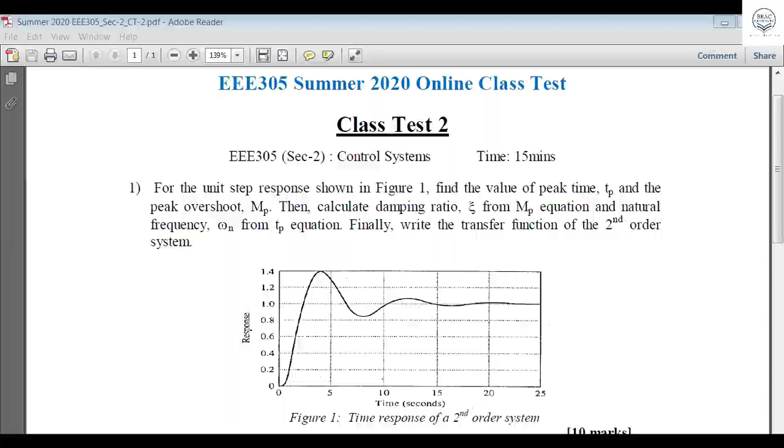Okay, once I think the rest of you have already sent it, so everybody is okay. Now let's come back to the class. I'm going to show one thing first before going to the class. All of you can see the thing. Can you see the screen or not? Can you see the screen, all of you? Yes sir, some of you already dropped the class, yes sir, I can see.

I'm going to take a snapshot of those who dropped, because I will catch them. Simply, you cannot drop without us. You have to go for the class. What do you do, sleeping at home now? Okay, just inform your friends to come back, otherwise I'll be catching them.

Now let's come back to the point. This is one important thing I'm going to show. Just after the exam, you drop out, what the thing is going on I don't understand. If your internet is cut or you have a problem, you should call me over the phone. Okay, now let's come back to the point.

This is the midterm exam cover page. I have already uploaded it to the Box and sent it to you most probably, or in the buX you can find it. You can see what you have to do. Download it and get a printout of it. I'm telling you again, download and print it, the hard copy. After that, by hand, each of you write your name, ID number, course title, Control System, course code 305.

Okay, 305, then semester, Online Summer 2020, and section 2. Once you're done, it is all you have to do today or tomorrow before the exam date, so that it is ready in front of you at the time of exam.

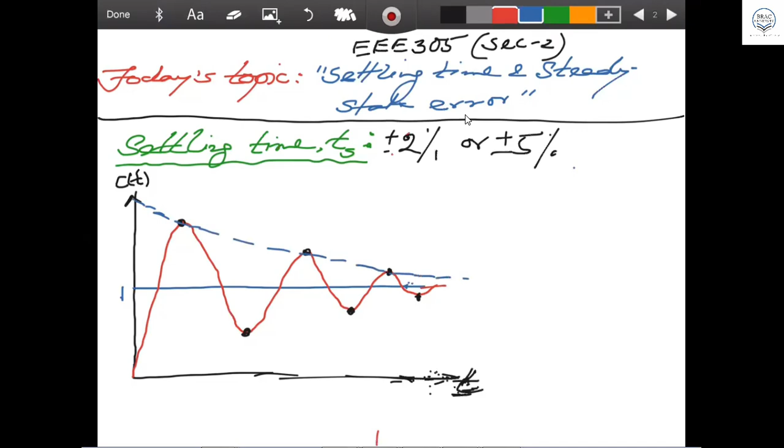That's internationally we have explained in the last class. Now, in order to find the settling time, if you look carefully, this is the peak, this down peak, up peak. What we can understand is that the sine wave is dying out slowly, exponentially. If you go on the lower side as well, the lower peak also gives you the impression that it is dying out exponentially. So the sinusoidal is exponentially dying out.

So what the blue curve represents is the envelope. If you go with the upper envelope, what is the equation for the upper envelope? The upper envelope equation will be only the exponential decay, e to the power minus zeta omega n t, divided by root over 1 minus zeta square. The exponential term will be here, because the blue envelope is an exponential curve, exponentially dying. So the sine wave term will not be here.

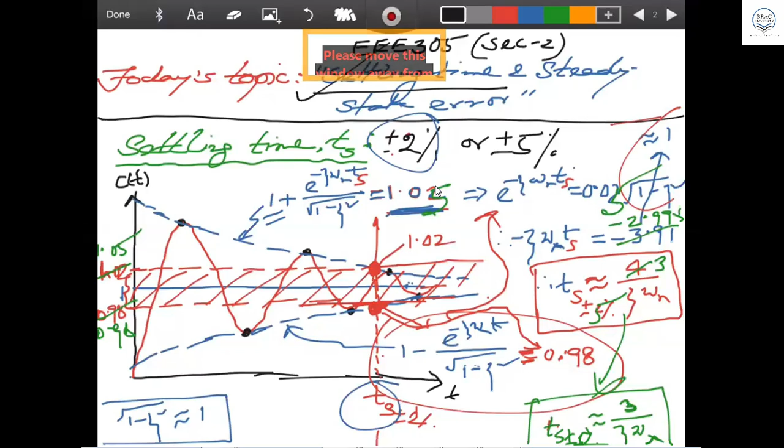I think at the end of this class, those who are having some problem, we can discuss it. Now, this is all about settling time. Now we are going to jump to the new topic, settling time part done. So second order time response is completed. Our new topic now will be steady state error. That is our next topic. This settling time in the last class was a continuation from before, as you know one of the parameters was left.

And today we are going to talk about steady state error. Steady state error plays a very important role, all of you should understand. If a machine is producing a nut bolt from the CNC machine, and you have designed a control algorithm and sent the data to the machine, and the machine produces a lot of nut bolts, but if there is an error, then continuously producing 1 million nut bolts, all will be rejected because a continuous error is present at the output. So error in the output is a serious problem in engineering, or in the field of engineering. As an engineer, you cannot allow that. So there should be error free output, so we have to study what steady state error means.

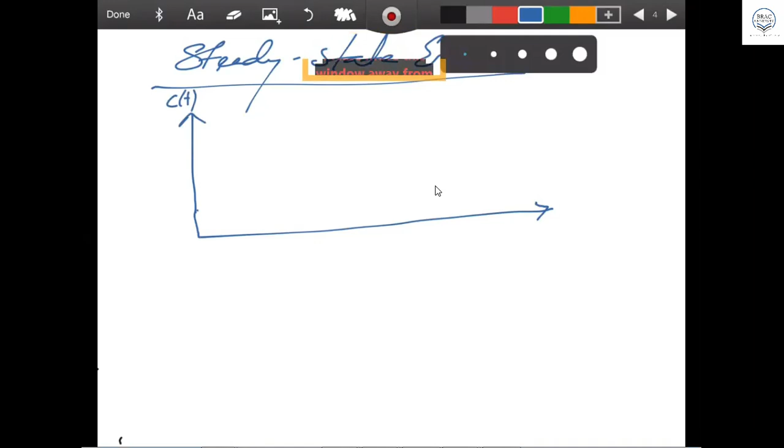And you can easily understand the steady state error thing. Look at it, I'm just going to draw a time response curve, as you already know. So if this is a unit step input, and this is the thing coming, ting, ting, ting, going like this, and meeting here. But as I said, there are some cutting points here, so we can say that this is the cutting point. What does it mean? It means t tends to infinity here. And this is the transient time, transient, and this is the steady state. Steady state and transient period. So the transient period is first, a shorter period, and steady state a longer, infinity you can go. Now, we have already studied last class this part, the transient part, all the parameters: rise time, peak time, settling time, all these things we have studied. And today settling time also done.

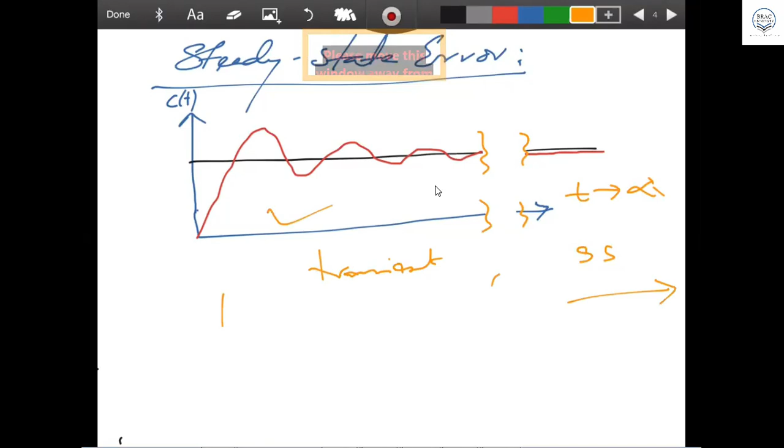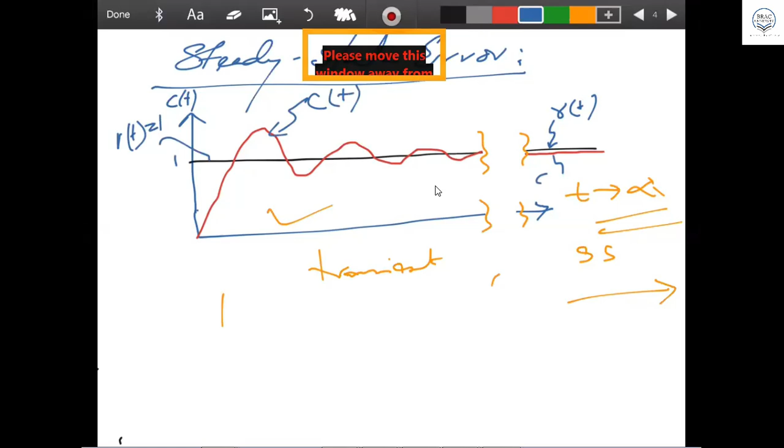Now, steady state error on the right hand side, there's a t tends to infinity side, that is steady state. And if you go, you can see here that this part is your RT. This is RT equal to 1, which is RT equal to 1, you know that RT equal to 1 is step input. And this one, the blue, the red one is CT. So CT is coming here, and RT is on the top. So the difference, you can see the error there, a little bit error is present, and this is your error ET.

So ET will be what then? ET will be nothing but RT minus CT. You can just think like that. Continuously, the difference coming at the output, and if for t tends to infinity this difference is coming, then we call that the error the steady state error.

T tends to infinity, this error is giving you the steady state error. Continuously the error is coming, it's steady. How to define it? Limit t tends to infinity of ET, where ET is the error, which is the difference between RT and CT.

So the steady state error, this is your steady state error definition. We can write that ESS equal to limit t tends to infinity ET.

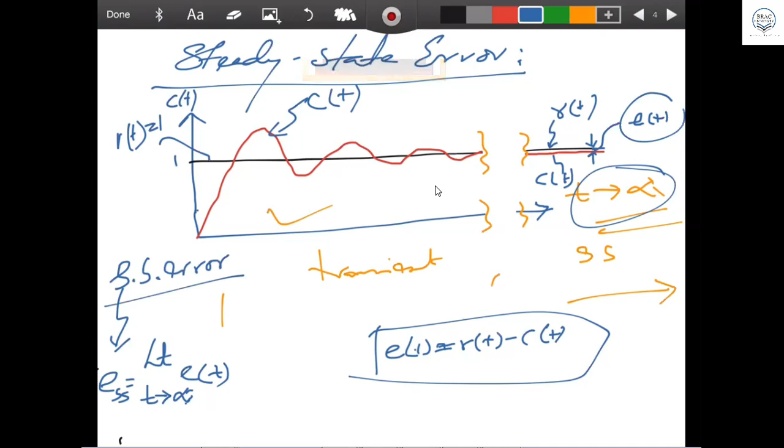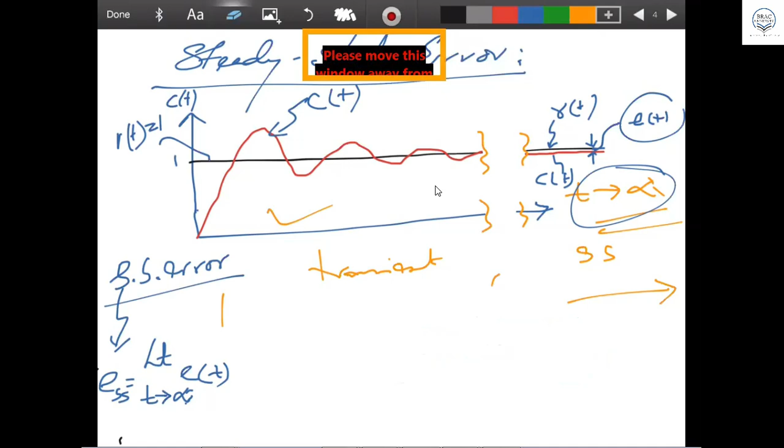Now, according to the final value theorem in Laplace transformation, what does it say? In EEE 243 signal systems you have studied the Laplace table, where the final value theorem gives you limit t tends to infinity of f of t, a function of t. If you take the Laplace transformation, you will get limit s tends to 0.

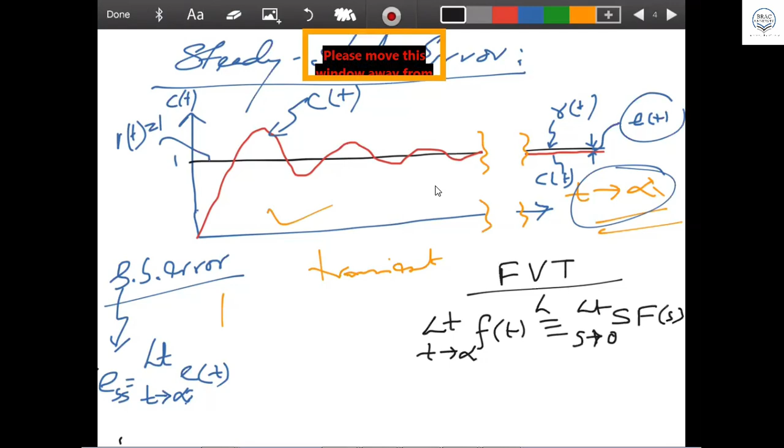s tends to 0, s times F of s, if the initial conditions are 0. So this is what the final value theorem says. This is the time domain, this is the frequency domain. So time domain relates to frequency domain like that.

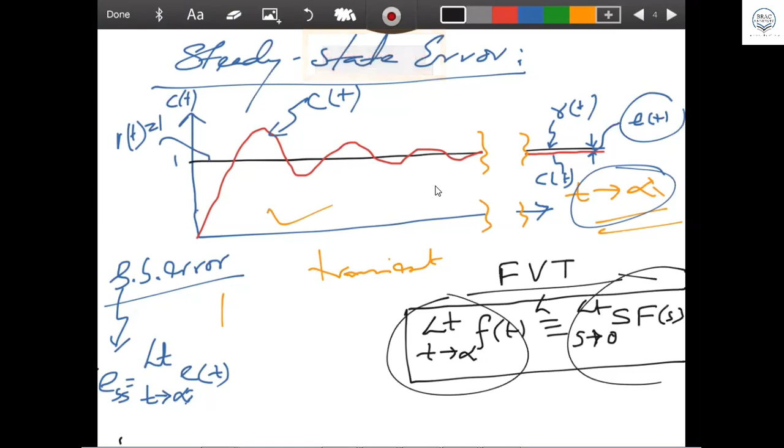So if this is the scenario, if you apply the FVT here, what equivalence comes? That is, e(t) will be in terms of the frequency domain. It gives you s tends to 0, and it will be S times ES. So your steady state error definition in the frequency domain, through the final value theorem, comes as Ess equal to limit s tends to 0 of S times ES.

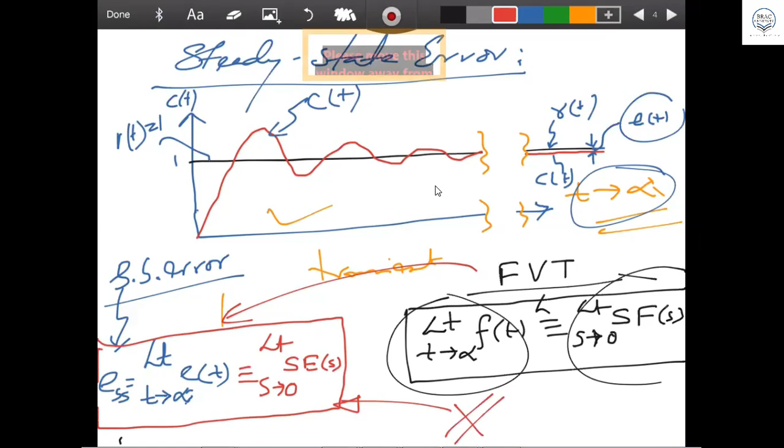So this is our definition in time domain as well as frequency domain, and we got that through the FVT, final value theorem. So what was that? The steady state error is equal to, in the frequency domain, limit s tends to 0 of S times ES. That is what we got. I think you all can remember this. Steady state error is equal to this.

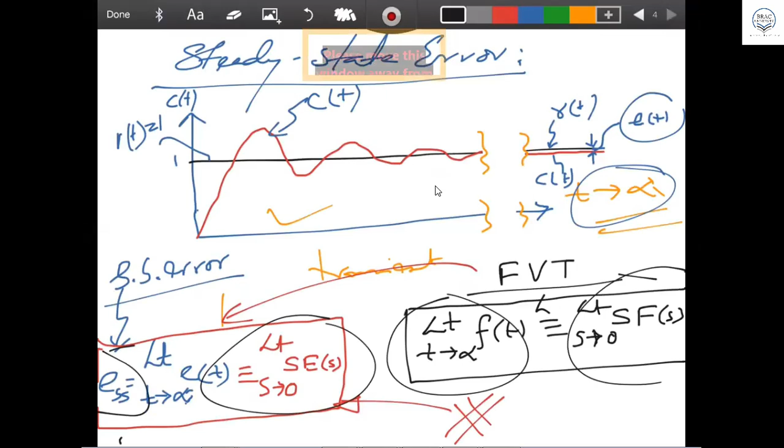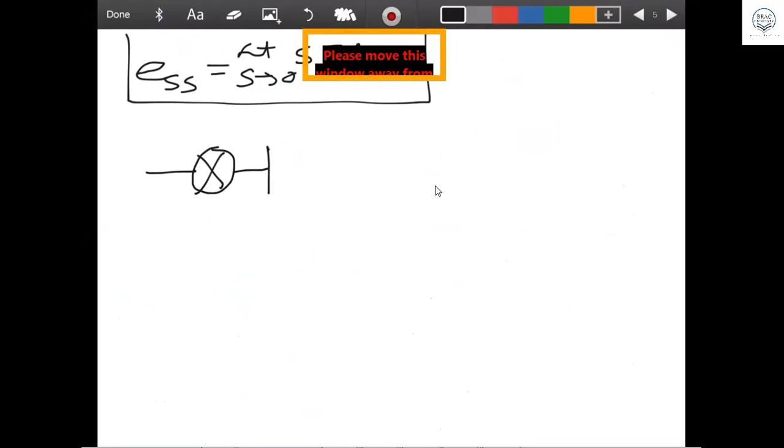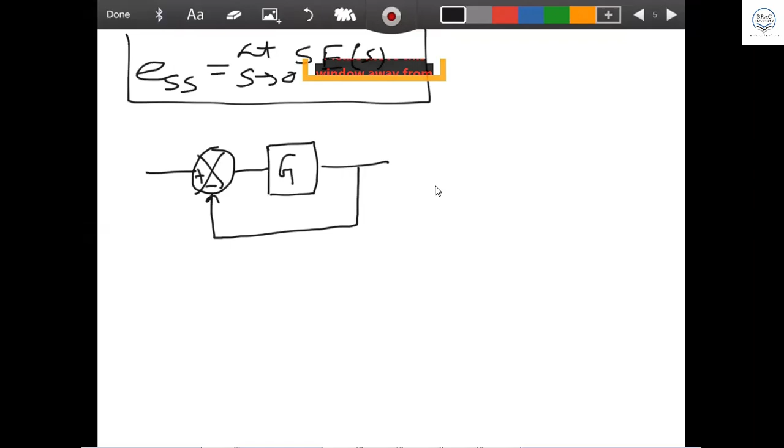Now, let's go with this. If you look back at our canonical form, which is like this, the plant is here. And if we consider for the sake of simplicity that it is a unity feedback, then minus, this is plus, this is your G plant, this is your C, this is your R input.

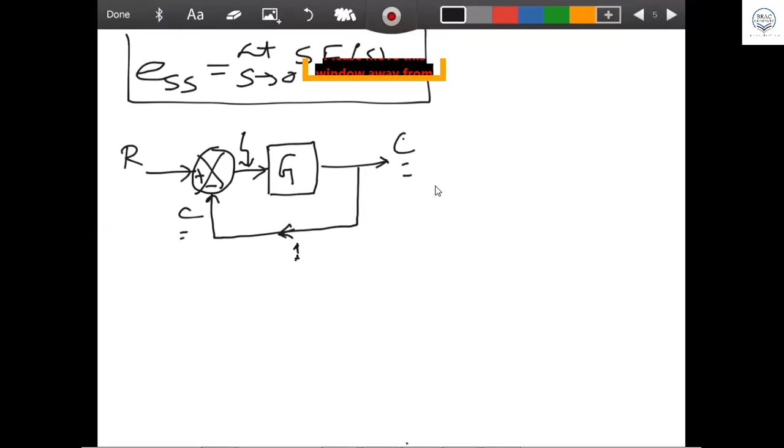And this must be C in that case because it is unity feedback, H is 1. So unity feedback, then your C is straight away coming as feedback. If C is coming as feedback, listen, this is the E, this is the error, and error will be R minus C. That's the reason why we take E like that.

Now, you remember we studied the error ratio last time from the canonical form. Error ratio, find the error ratio. What was the error ratio? Remember, E by... what? E by R. That's the first thing.

Then 1 by what? First, tell me what this is. 1 divided by what? 1 plus GH, excellent. But what is H here? 1. So we don't need to put H here, simply H equal to 1. So let it be 1 by 1 plus G. Should be fine.

I'm not writing S capital because you have to understand that all capital letters mean this is in frequency domain. So if you come up with this, what is E equal to? Equal to R, you cross multiply, and this comes here, this goes there as G. Is it okay? Cross multiply. R is going there as a signal.

This E, you are going to take it here. If you substitute the E here, what do we get from here as steady state error? ESS is coming here as limit S tends to 0. And if you substitute that E over there, you are getting here as SRS. We can write S now, so this S coming there, so you can understand that S is a function for each of them.

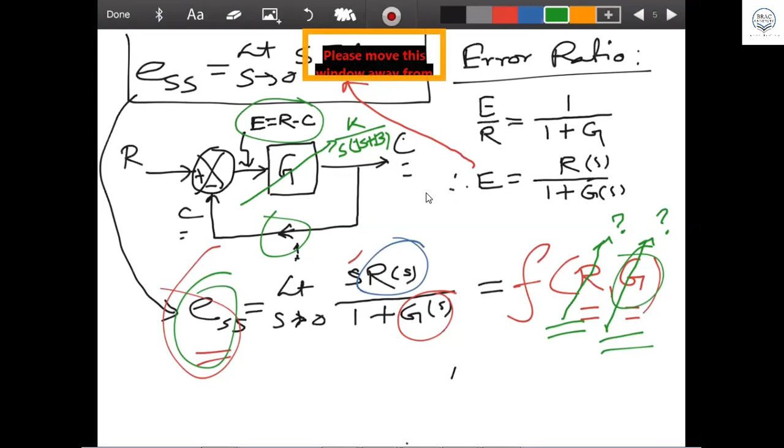Can anybody tell me, I told you earlier, servo system is a type of what? What type of system? Type 0, 1, 2, 3, 4? Type 1 system. Excellent. So we are going to consider different types of systems here - it can be type 0, type 1, type 2, type 3, type 4, type 5, different types.

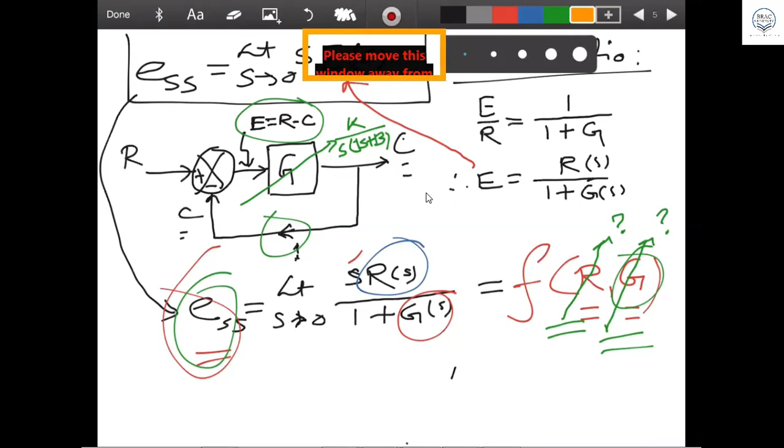So we are going to consider different types of systems here. Instead of considering 0 to infinity types, remember, no question here - why 3? I'm going to take 3 types of input and 3 types of system. 3 inputs and 3 types of system, that's it, we are going to consider. You can consider 0 to infinity types, doesn't matter. But we are going to consider these for simplicity, and from there you can easily understand what will happen for the other types and the other inputs. So these are the things.

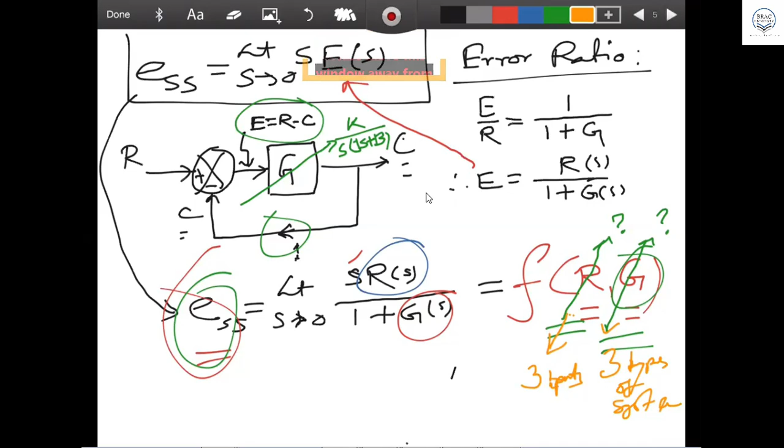Now what input and what type we are going to consider, I'm going to show you here. I'm going to write it. The types we are going to consider are 3 types. One is the unit step input - you know that unit step input is R(t) equal to 1. So R(s) will be what? R(t) equal to 1, if R(t) equal to 1, R(s) will be 1 by S. You all know that.

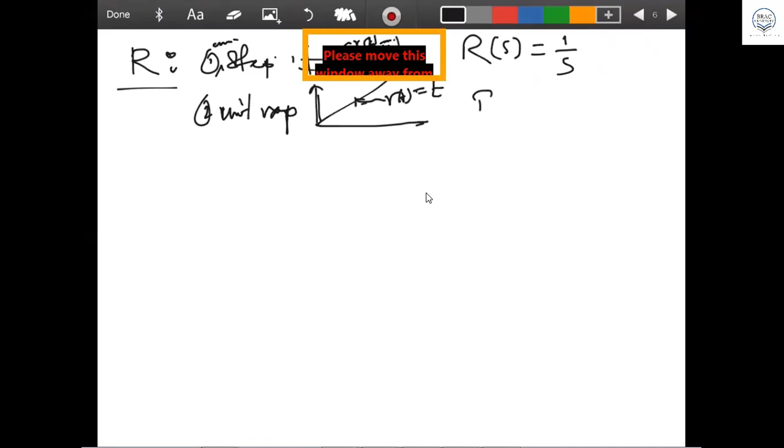And number 2 is the ramp input, unit ramp. I'm not telling you in detail because you know that from EEE 243 signal systems. So this is ramp input, and the ramp input equation, R(t) equal to what? T. R(t) equal to T, good. Then R(s) will be what? 1 by S square. Excellent, 1 by S square.

And then the third one we are going to consider is the unit parabolic input. The unit parabolic input is T versus R(t), where R(t) equal to T square by 2. Unit means we make it 1 when you go for R(s). Now if you go for R(s) here, it gives you 1 by S cube. That's it. So this is the way we can go. Up to 3 inputs we are going to consider.

Likewise, we are going to consider 3 types of system also, G. So if you want to consider 3 types of system, you have to find a generalized equation for a system. In general, we can say G is equal to - let's say K is a constant - we can say 1 plus T1S, these are the zeros on the top, T2S, dot dot dot dot dot dot, and there are, let's say, TMS. There are M zeros there, and the same thing on the bottom as well. We can say S to the power N, the poles, S to the power N pole, and this is the pole at S equal to 0.

Remember, different locations of poles on the S plane. So S to the power n, this is located at S to the power n. Okay, I'm just writing - you are all thinking, what is this? This is n. S to the power n, I'm writing the n in red pen because this n is a very significant thing. So S to the n is a pole which is located at the center. You'll understand it later why I'm telling you this.

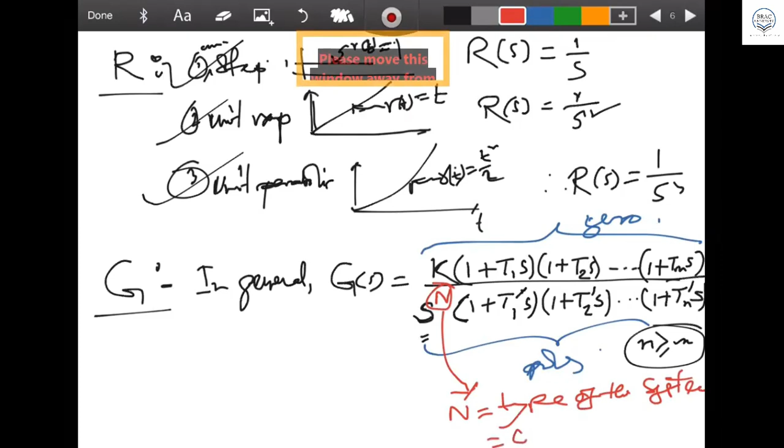Now, n value can be 0, 1, 2, 3, dot dot dot, up to infinity. It can be. So if n value is 0, then it is a type 0 system. If n value is 1, it is type 1 system. N value is 2, then it is type 2 system. This is the way the n value is indicated.

Now, in our case, the servo system G was K over S into JS plus B, right? And remember, some of you said just now, it is a type what? Servo system, type 1. And that is 1 is here, S to the power 1 is here, type 1. This one you can write like this, K by B, and then you can write here 1 plus...

In that form, I'm talking in that form. You want to write in that form, you can write it 1 plus J by B S. J by BS means, right? You get my point, what I mean? J by B means your format is like that format. This is the format we are going to follow.

This is that format. So there is no zero, but there are 2 poles in the servo system. One is at S equal to 0, the other one will be minus B by J. So these 2 are the 2 poles, this and this, but all others are not present, only K is present. That's the way this servo can be defined, and it is a type 1 system.

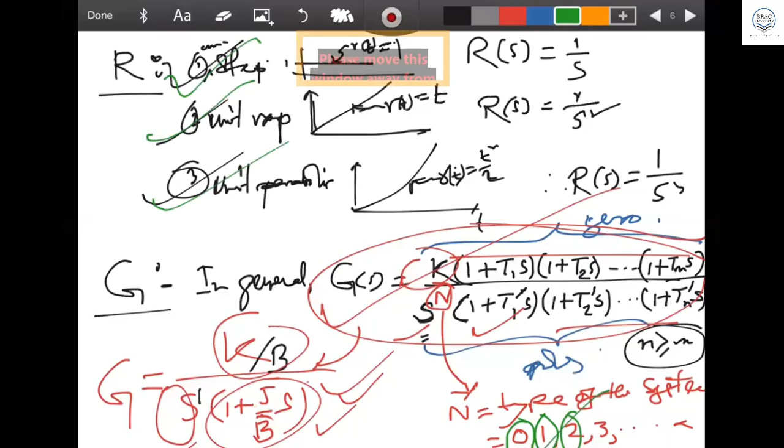This is a general equation I'm talking about, and this is for a particular servo system we are going to answer. Now, for our simplicity, we are going to consider type 0 system, type 1 system, type 2 system. Only these 3 types of system we are going to consider, and 3 types of input we are going to consider for our steady state error analysis. Anybody got any question, or we are jumping to the next point?

No question. Now, what we are going to find? We are going to find the steady state error for different types of system. So we can consider first type for a step input first, and then we'll find it. So first of all, our target is to find the steady state error for, let us go for unit step input. For unit step input, we are going to find this thing. You told me just now, unit step case, RS is equal to 1 by S. If this is the scenario, what is the steady state error?

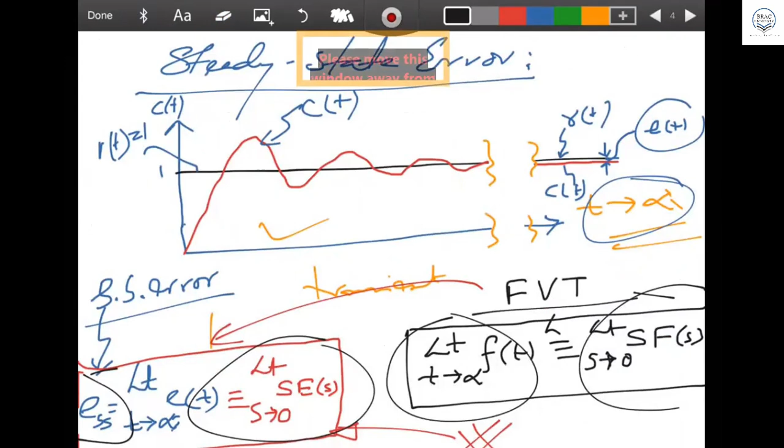If RS is the scenario, okay, I'm writing here the steady state error equation. Remember, what will be the steady state error? What is the steady state error equation? Look at it, this is the steady state error over equation, 1 plus G. Where's that, the previous one, right? No, not that one. Steady state error equation is this one. Oh, I think I have written there also.

Yeah, this one, you look at this, this is the steady state error. Steady state error definition is that limit s tends to 0, S times ES. And if you put ES, then the steady state comes here like this. So this is our final steady state error we are getting. So what is that? Limit s tends to 0, as you said, S times RS divided by 1 plus GS. So we are writing it here that steady state error is coming as limit s tends to 0, S RS divided by 1 plus GS.

Now, if you put the value limit s tends to 0, and S RS, RS is what? RS is 1 by S. So S RS for step input, and 1 plus GS. So the S's cancel out. Now you are getting it here like this.

1 divided by 1 plus, if you know calculus, you might know this can be written as a limit s tends to 0 of GS. You can take the limit like this. So 1 by 1 plus GS means you can say this is equal to 1 divided by 1 plus, and this one can be represented as K, sorry, KP.

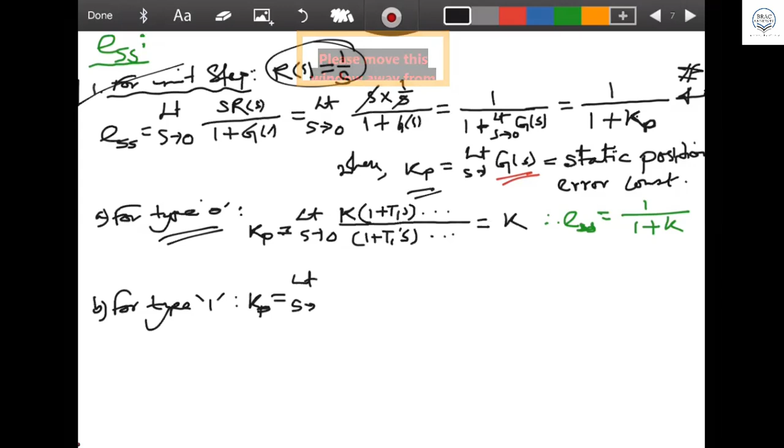So now if I ask you, every child can tell me very easily, if I consider type 1 system, what will be the KP? And you tell me the KP will be what? Limit s tends to 0, and KP will be what? KP will be K into 1 plus TS, T1S, and so on, and this one will be S to the power, for type 1, so type 1 means there is an S here coming, and there 1 plus T1S, T1 prime S, right, and so on coming. So what will be the answer coming there?

Sir, as S equals 0, so there will be infinity. Absolutely great answer, beautiful, everybody should understand this. If S is 0, then K divided by 0, all are 1, 1, 1. So K something divided by 0 is infinity. So this is infinity. Anybody got a question?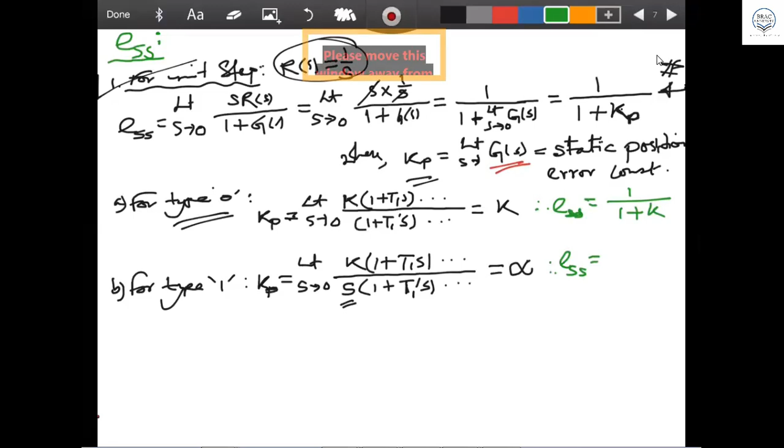ESS will be then what? Anybody? Somebody told me the answer. What is that? 0, sir. Absolutely good, excellent, because if K is infinity, KP, if you put KP equal to infinity here, 1 divided by 1 plus infinity is 0. Everybody should know that, I don't need to explain that. I think now, according to that, if you go for type 1, type 2, it is very simple.

Now your KP will be what? KP will be, so limit... Like type 1, sir, no, you can see here. Same answer, sir. Oh, like type 1. Yeah, that's right, like type 1, because it is the same thing happened. Excellent, good, so you understand it better.

Now you can get for this, type 2 means S square here, but it is same like type 1. You are right, absolutely correct. And dot dot dot, what will be this value? So infinity, sir, infinity, and steady state error ESS will be 0. Good, so you all understand it. Likewise, if you go for type 3, type 4, it will be similar, right?

Yes or no? Yes, sir. Only the value will be changed. Yeah, you all understand it, I hope.

Now, exactly the same way, please write it down by yourself and find it for the ramp input, unit ramp input by yourself. What will be the equation for ESS? Like I have found the equation for ESS in this case was this, where P is the static position error coefficient, which is like this. So you have to find what will be that one, and then you can go. If you understand, I hope that you can also do it. Can you please go ahead and find it by yourself?

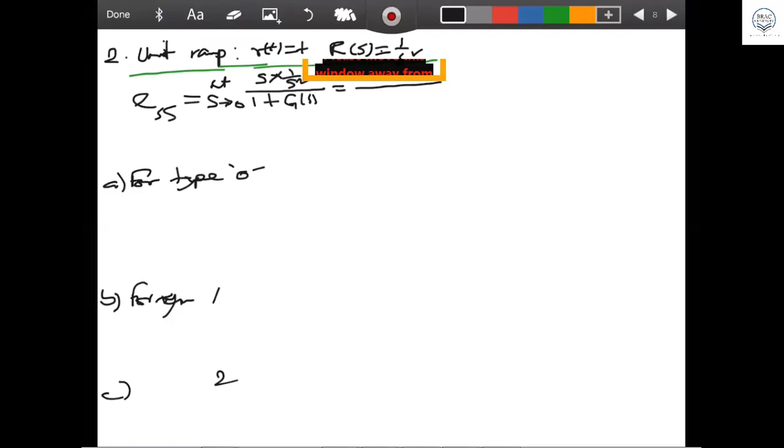So you are getting here, like the top is a 1, and this is actually limit S tends to 0, S plus limit S tends to 0. Just first time, that's what I'm going to show you, GS you are getting. So you are going to write here 1 divided by, this part is gone to 0. So you are going to write here limit S tends to 0, SGS, as you said, SGS.

Good, and this part on the top is 1, and SGS, since S means, last time GS we called KP, and now SGS we are going to call this one. S is a d/dt actually, we can think like that, so it's a position, then d/dt of position is velocity. So we can say this, SGS means, is a velocity coefficient. So we can write here as KV instead of KP, because S means is d/dt, and that comes into the frequency domain as an S operator. So we can write here instead of KP, we can say KV, velocity error constant.

So this is called, this name KV is called, we can write here this 1 by KV, where KV is, as you said, that limit S tends to 0, SGS, which is called velocity, static velocity error constant. This is called static velocity error constant.

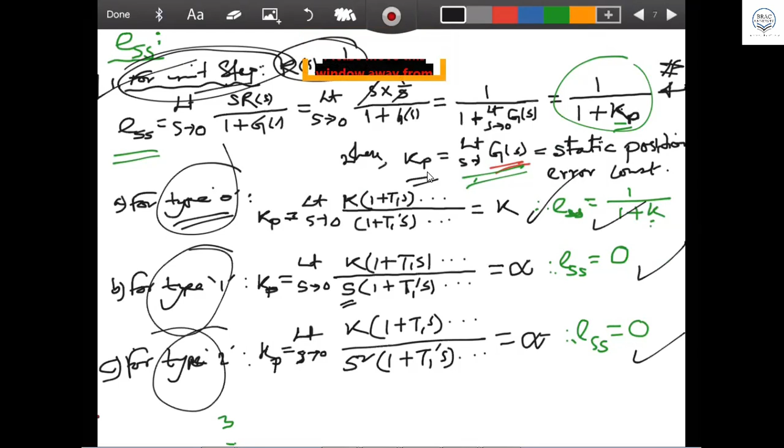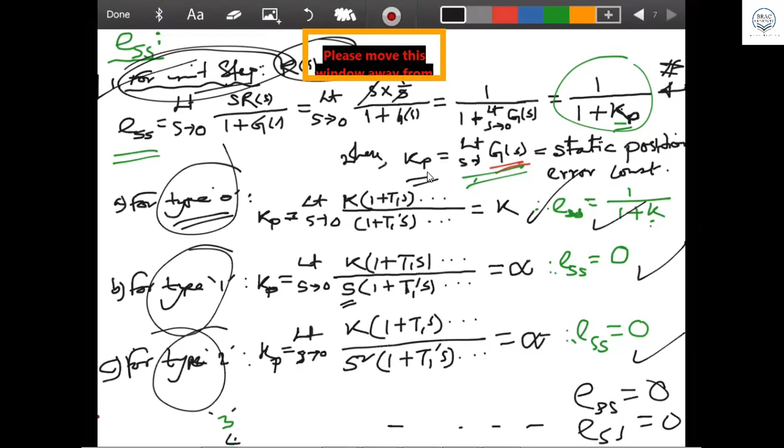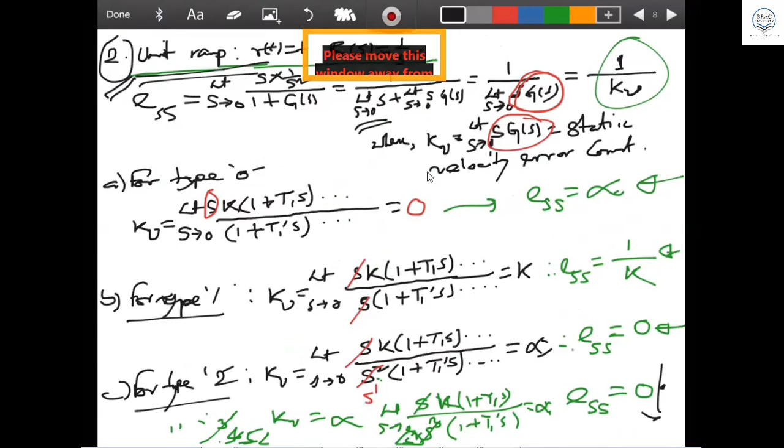And you can see here also, if it is type 3, as some of you told me earlier, steady state error will be 0 here. If it is type 4, again if you do it, you get steady state error 0 here too, right? Yes sir, yes sir. So what does it mean? In unit step also we saw that the more the type - 3, 4, 5, 6 and so on - the higher the type, the steady state error goes down to 0. So this is what we saw here as well. The higher the type, 4, 5, 6, we always say the steady state error goes down to 0.

So now our next input, the last input we are going to consider, is the unit parabolic input, as one of your friends mentioned. I think he is very much online with me. Good, now look at it.

Number 3 is unit parabolic input. I have already written the unit parabolic input. Can you tell me what is the equation for unit parabolic input? 1 by s cube, 1 by s cube, right? That r(t) was what? T square by 2, beautiful. T square by 2, good. T square by 2. And that gives you, as you said, R(s) is giving you 1 by s cube.

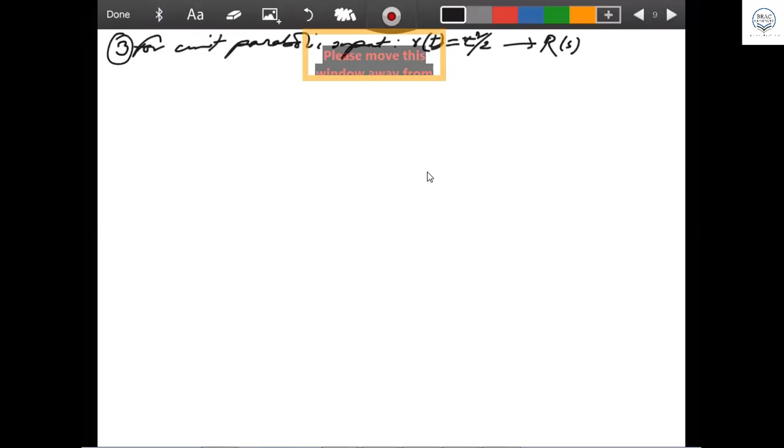This is the unit parabolic, and that's the last one we are going to study today, and then finish after solving one problem and go back home. Now, you are already at home. Now listen, this is what we can have.

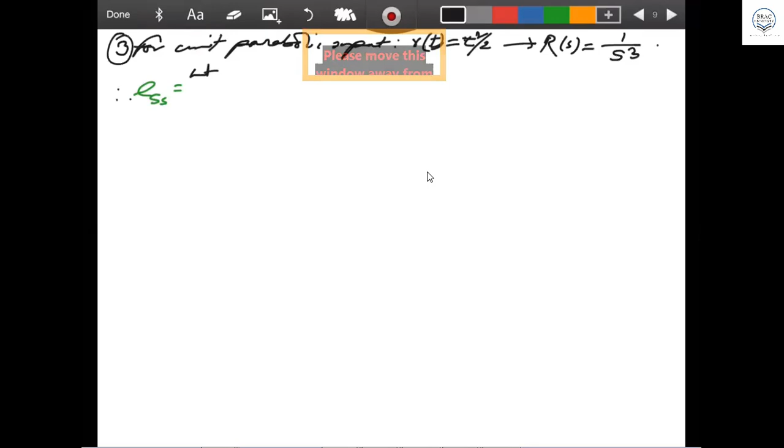Now you can easily understand from here, by definition, the steady state error equals what? The steady state error equation - we have already found this is equal to s R(s) divided by 1 plus G(s), as you all know. Now can you tell me, what will be the final equation we get from here? So 1 divided by, limit s tends to 0, s square plus limit s tends to 0, s square G(s). So that one and the 0 cancel out. So what we're getting here is 1 divided by - ultimately, I'm not going to do it fully, you can easily understand - 1 divided by limit s tends to 0... s tends to 0, then?

S square, right. S tends to 0, s square GS. Beautiful, S square GS. This is what we can do exactly the same way we have done earlier, so everybody should understand it.

Now this can be written as 1 divided by this, and we call it K something. S square means d square by dt square G, that means in frequency, acceleration. So what is K? Ka, right, Ka. So we can write here 1 divided by Ka. So we can say this is the Ka.

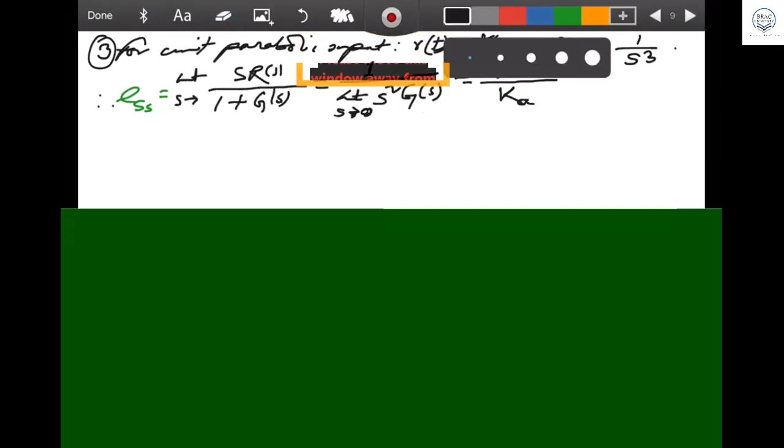So if this is the Ka, I think all of you understand it, right? Where Ka is the static acceleration error constant, like the velocity one, that way we can say it.

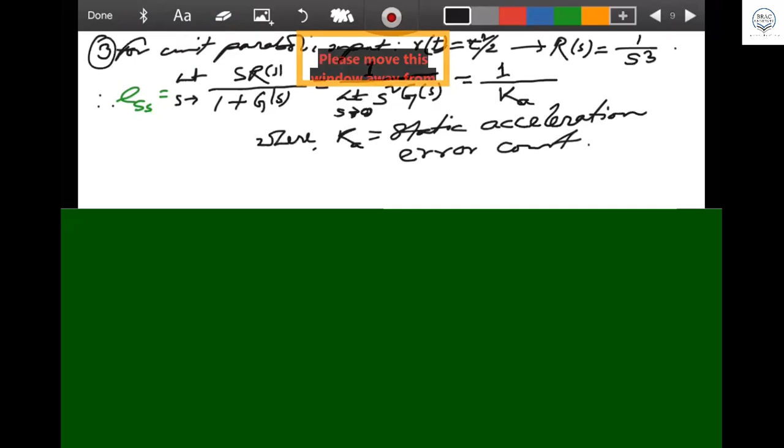Now we are going one by one. For type 0 system, we'll find from here what is the steady state error, what is Kp, what is Ka, or we can say Ka is limit s tends to 0 of s square Gs. This is the formula, Ka equal to this. It is limit s tends to 0, s square Gs. So Ka is s square Gs.

So limit, you have to write here s square K, 1 plus T1s, the standard equation. And this is what type 0 system means: it is s to the power 0, so it is 1, T1 prime s, dot dot dot, equal to what? I'm asking one person - please, those who are answering, be silent if anybody else can give the answer other than these guys.

I'm asking, anybody? Rafi Khan, Hasibul Hassan, anybody? No? You can tell me the answer. Dilshad Jahan Shubha, yeah, what is that? Zero. Good, zero, absolutely correct.

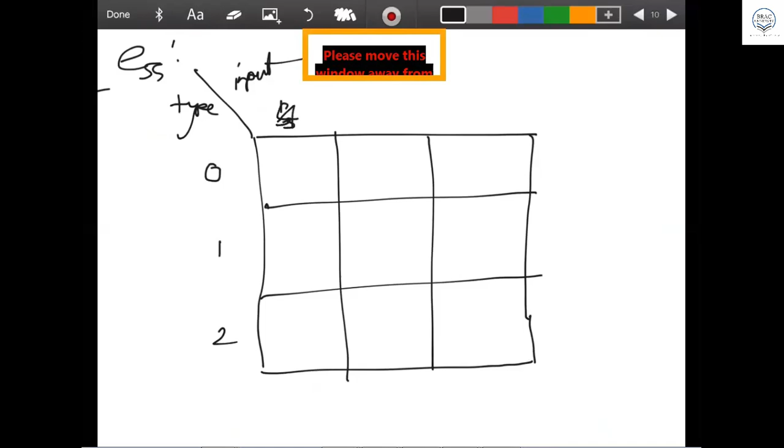These things I'm writing here as a type. Okay, this is the input, and this is the type. Type is what? Type 0, type 1, type 2 system. And input is step input, 1 by S. This is step, this is ramp, this is parabolic.

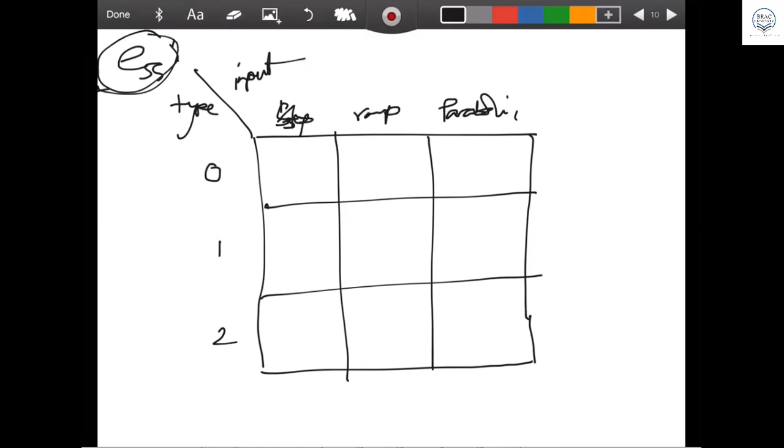Okay, now you have to tell me what the steady state error is. I think you really copied or not, just sleeping and doing nothing. Rahtul Jannat, are you here? Yes, or sir, busy? Okay. Yes, sir. So Rahtul, can you tell me what is here?

What will be this steady state error? Sir, for ramp, parabolic, type 1 equal, type 0 is infinity, type 1 is infinity, type 2 is 1 by K. Now, but my question here, this one is what type? Sir, type 1. And what is the input? Infinity. Hey, input I'm talking about. This is the input line and this is the type.

So you said this is type 1, and I said, what is the input here? What is this input? Oh, you cannot see. Can you see? What is the input? Sir, ramp. So this box means if we apply ramp input to a type 1 system, what will be the steady state error? Have you copied? Then tell me. Ramp input, type 1 system, what is the steady state error?

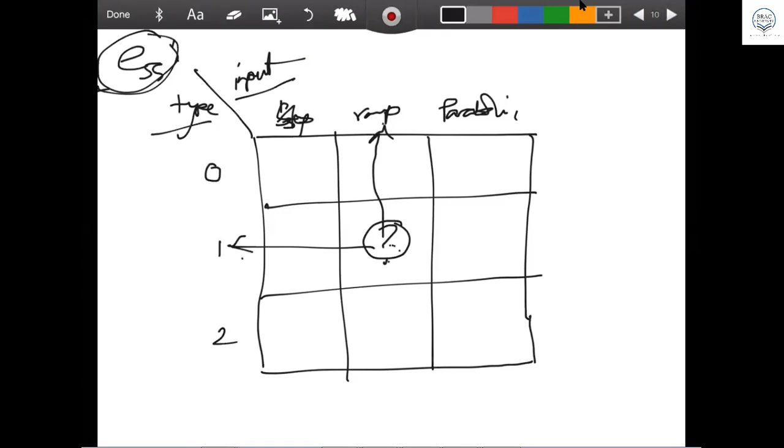1 by K. Please, no boyfriend, let her answer, and she doesn't like any boyfriend here. Hey, do you understand it? What is the K, answer? Is it K? Now, what? Only K. Is that ESS? ESS equals, yes, 1 by K, 1 by K. Good, it is ESS, of course it is ESS. So you should tell me 1 by K. Good, that is the answer.

Absolutely correct. Now I'm going to ask another guy, Adnan Islam. Adnan, are you ready? Sir. Okay, sir. Can you tell me what will be here?

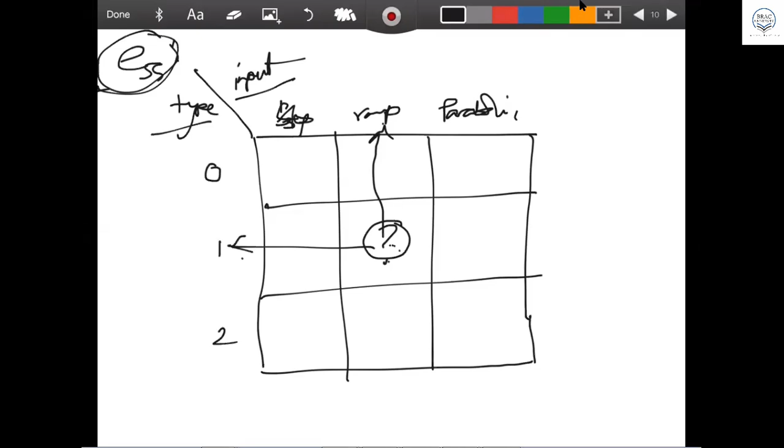Can you see, Adnan? Okay. No, sir. Okay, now can you see now? This one. Yes, sir. Okay, what will be this? Sir, type 1 parabolic, sir. Yeah, type 1 parabolic. So what will be the steady state error, you've written in your paper? Then I'm not going back. Infinity, sir, it is infinity.

I'm asking everybody, is he correct or not? Yes, sir, yes, sir, yes, sir. He said it is infinity. Okay, fine, that's great. Now I'm asking another duck. Please don't leave the room. No marks for it, even no performance. I'm just checking that you are busy with something else, watching movie, or you are here with me online.

What will be the steady state error? Type 2, sir, 1 by K. 1 by K, you said it is 1 by K. Is he correct or not? Yes, sir. Okay, good, excellent.

Now I am asking one duck, Saida Amanna Sadia. Sadia, you are caught. Are you scared? Yes, sir. Okay, good. Now you tell me, Sadia, what will be the thing here? Over here. It is type 0 step, and the answer would be 1 by 1 plus K.

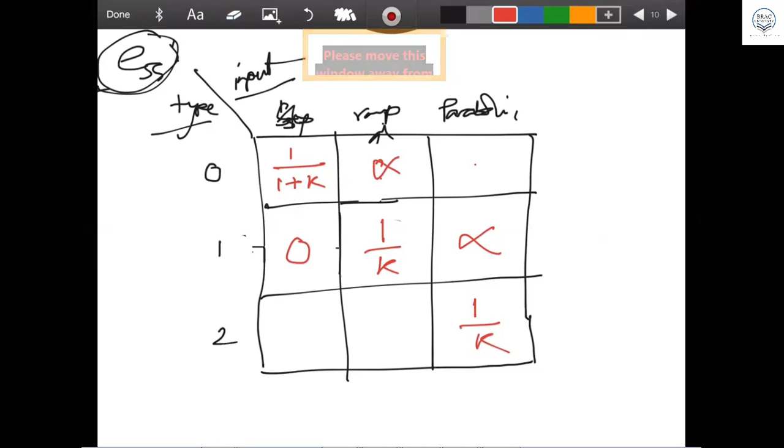Anybody can tell me what will be this? It is 0, sir. Everybody check if that's correct. Okay, what will be this here - ramp and 0? Infinity, sir. What will be parabolic? Infinity, sir. And what will be here? Step, 0.

0, 0, 0. So now I want to ask, who can answer what will be here? 0, sir, 0. Good, Type 2, absolutely great. That means you understand - it is a type 2 system for parabolic input.

It is 0. And what will be here? Sir, 0, also 0. The higher the type, the steady state error goes to 0, 0, 0.

Got my point? So we can say the steady state conclusion is: steady state error is going down with the increasing of type. As the type increases, the steady state error decreases. That is the conclusion.

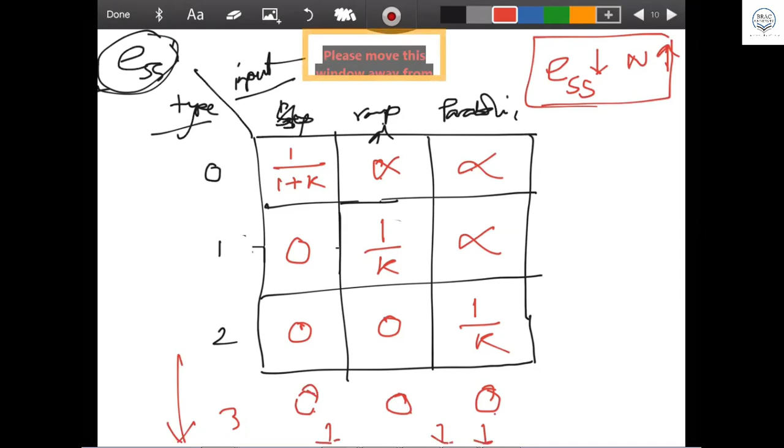Now I hope you all understand what this means. It means if we apply a step input in a system, if it is a type 0 system, then the response will be like this, having some error - there will be some steady state error. But if it is a type 1 system, then it will be 0 steady state error, which is a servo system, as you can see.

So if it is a servo system, with a step input, the output will be like this, and it will mix up with the input - there is no error coming there. That's the thing. And for type 2, type 3, if you apply the step input, similar to a ramp input...

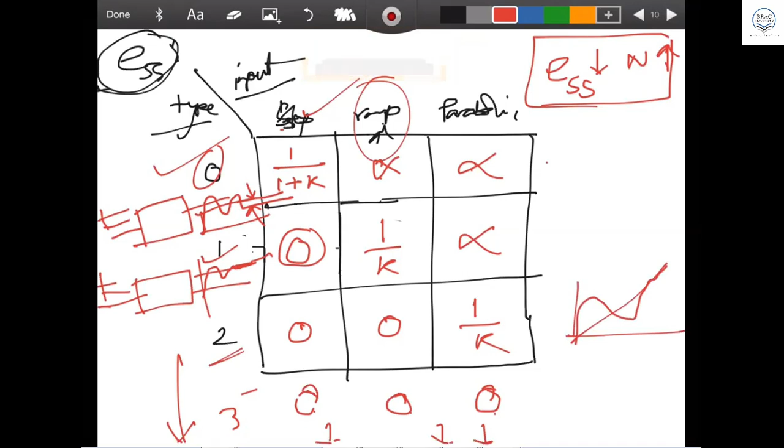If it is a type 2 system, the ramp output will come like this, making it just 0. But if it is a type 1 system, applying a ramp input, the output will be like this, and there will be a constant error coming here. But if you apply a ramp input for a type 0 system, then the steady state error is infinity.

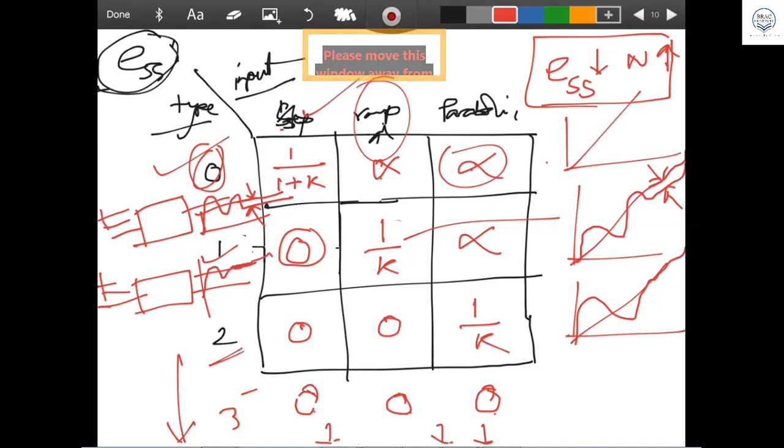Infinity means what? If steady state error is infinity - I'm talking about a ramp input here, not this one - infinity ramp input means the output is going on increasing infinitely, meaning the system has become unstable. Infinity output means infinity error means the system has become unstable. This is just a graphical representation I'm showing you here.

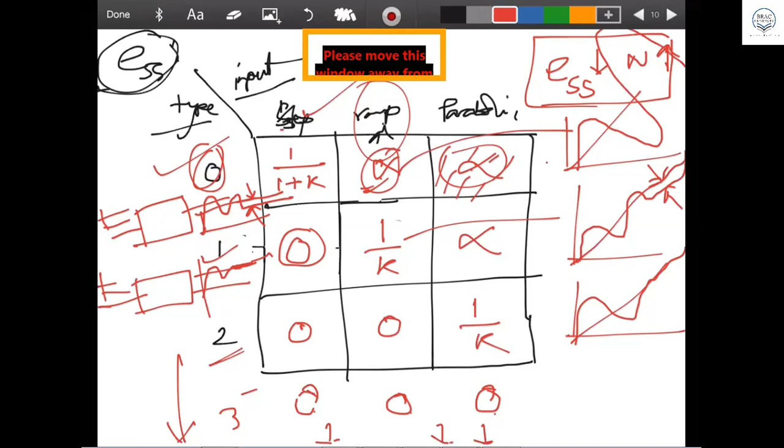I hope all of you understand the meaning of this, and we are finishing. I'm not going to do any more. It is already done.

So what we have to go for is one practice problem, maybe we can see here, just one, if it's okay. This is what you can do at home. If it is there, I'll show you, otherwise let's just go - yeah, it is there. So maybe we can see this thing, and the other things you can do at home.

Look at this picture, this is the problem I'm asking you. Can you see the problem, all of you? Yes, sir. Yeah, this is the problem we'll solve, and then we are finishing for today's class.

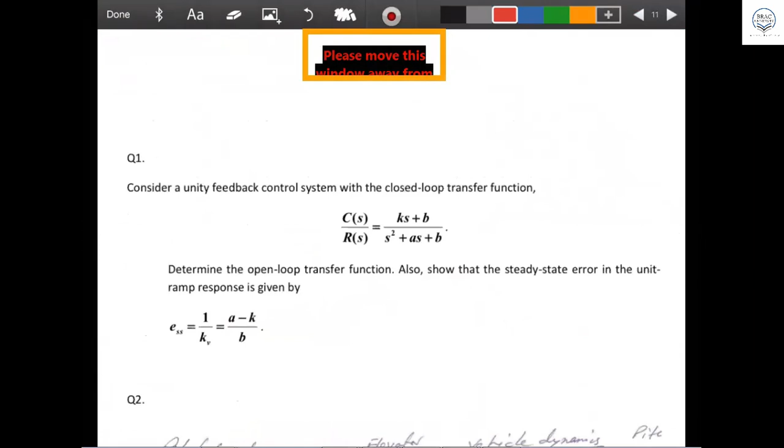If you read this question, you get a snapshot - I think you can try at home. Now if you see this question, the first part you have already done. Considering unity feedback control, the closed loop transfer function C by R equals this. What you have to find is determine the open loop transfer function. I'm not asking you to do it because you have done it already - can you remember?

No sir. G is a unity feedback system. Can you remember? You did this in the first class. Hey, are all of you sleeping? No sir. Okay, C by R equal to what? Can you tell me, anybody here? Hey, you should know that.

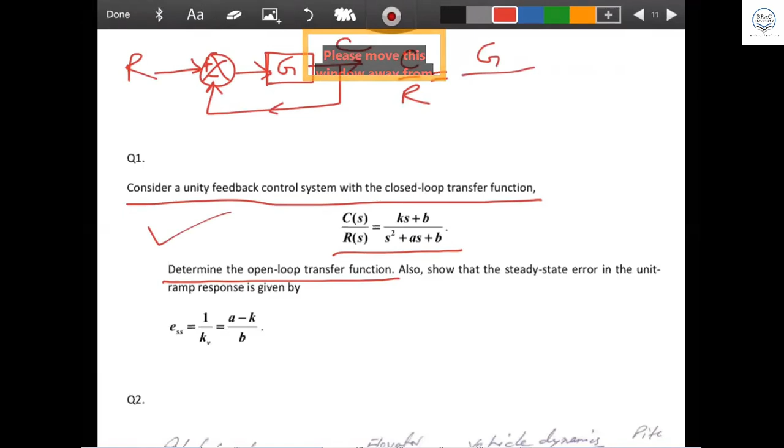G by 1, G by 1 plus G. This is C by R, that's given here. So you can write the G over 1 plus G. C by R is this from here.

Now can you remember this type of problem you solved? Then you cross multiply with this thing, cross multiply with that thing. And from this cross multiplication, you found the G value. Can you remember? Hey, rest of you, can you remember what I'm talking about?

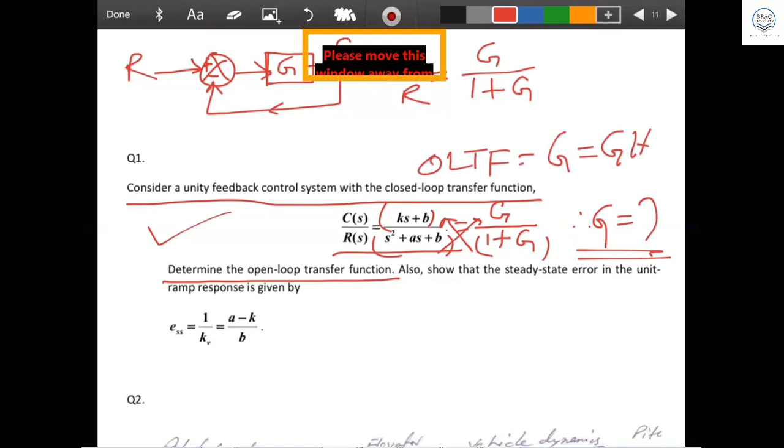Yes, no, maybe sir. The K value, maybe integer value 3 to 5 or something like that, or it can be a KB, I don't know. But from this cross multiplication, you found the G, and that G is nothing but GH, that is the open loop transfer function, because H equals what?

One, right sir. So your open loop transfer function means GH means G, and that G comes here. So whatever answer you get from here, your answer is done. So the first part you did billion, trillion years ago, that means in the first class.

Can you remember now? Yes sir, you cannot remember. Open the classroom notes, you can see, oh my God, we did it already. Okay, now let's come to the second part of our question here.

Also find the steady state error equal to this, that is our question here. Now, anybody got the class notes for the first class we did? And what was the G value we got? Can anybody remember, or can you tell me if you have it? No, it is not with you here, right?

1 by 1 plus K. It's something like, yeah, like something like that, as K S square, S into S plus K minus A, like that. Cannot remember, right?

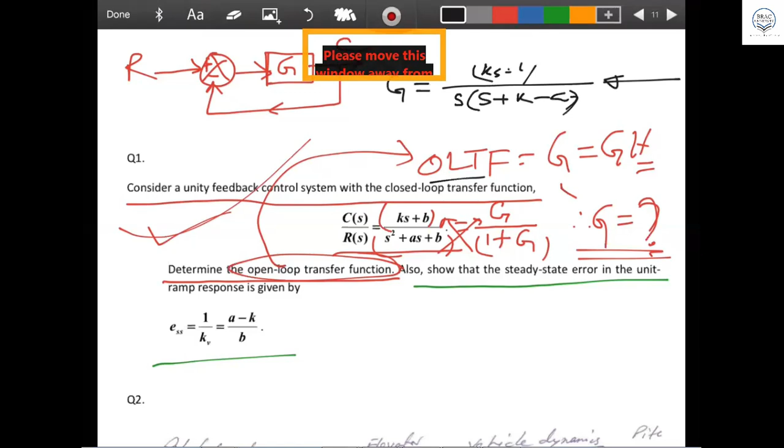Okay, you should get something like this, and then steady state error for unit ramp input you have to find. And in unit ramp input steady state error, what was that? You can just substitute the value, then you can find it. Like ESS equal to what? Limit S tends to 0,

and unit ramp means S into RS. RS means what? RS equal to 1 by S square and 1 plus GS. That's it. Okay, now S square cancels out to S, and we are getting it here. S is there, 1 divided by S plus SGS, right?

We got it, this thing, now S limit S tends to 0. So that part S is gone. So 1 divided by limit S tends to 0. And yeah, you got it?

Anybody? And S into, now we are going to substitute that S value here. And if you put that S value here, then maybe I think the value was, on the top was A minus K, you can see. And bottom is something like that. So it's B K S into S plus A minus K, A minus K.

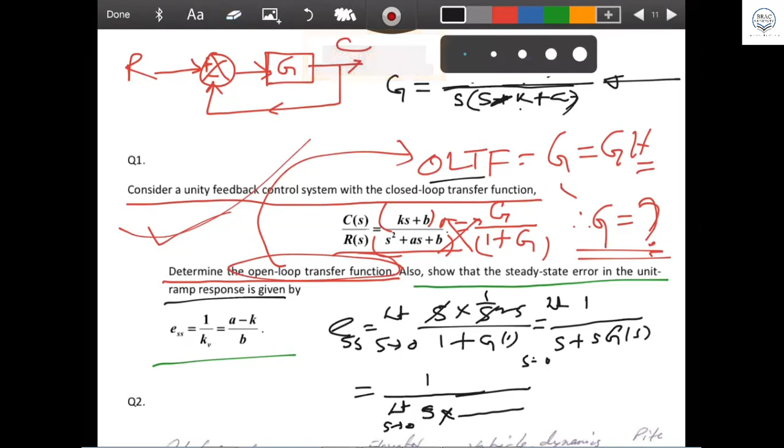So this is minus, it's minus, this is plus. This is something like that maybe. A minus K, and on the bottom is what? On the bottom is not this. Actually, I have made a mistake. On the bottom, anybody found the answer? No, on the bottom, most probably it will find B.

That was the value of G. No, I'm talking about C by R equal to what? 5s plus 2 divided by S square plus 3s plus 2. Yeah, that is what you should tell me.

Now you compare with the, and what is the value you got? G equal to 5s plus 2 by S square minus 2s.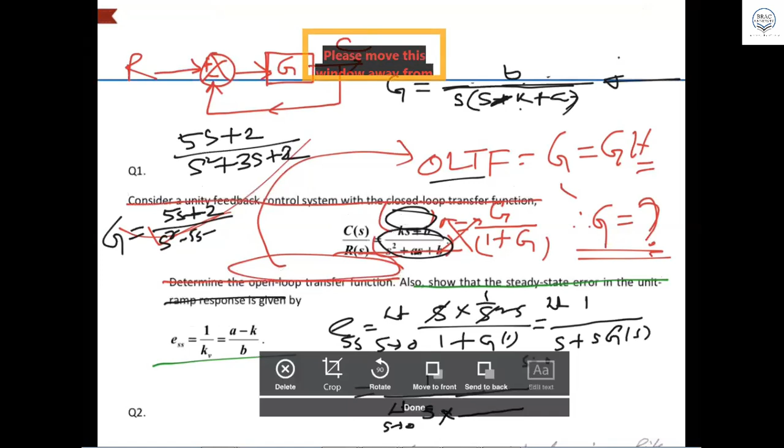Minus 2s means you can have minus 5s plus, what? 5s plus 3s, right? That is 2s plus 3s. So you can compare it and get something like this: g equal to then 5s.

5 means your k, ks plus b, 2 is b, right? This is what you get. So you are writing here ks plus b divided by s into s minus, s plus a minus k. This is what you are getting here.

Now you can see your s's cancel out. So what, s equal to 0, if you put, what do you get? S equal to 0, then a minus k is going on the top, and bottom is b. So your steady state error is coming here like this, and that is what you have to prove: steady state error equal to a minus k by b. You got it? It is proved.

Hey, all of you, your brain was short circuited. Okay, I understand it. It's a very simple problem. All you have to know is you have to do it. Actually, I just directly jumped from here to there, that's why all of you are confused. But if you follow the formula and find the g, and then find steady state error equal to this, you get, oh, it is proved already. Got it? I understand it.

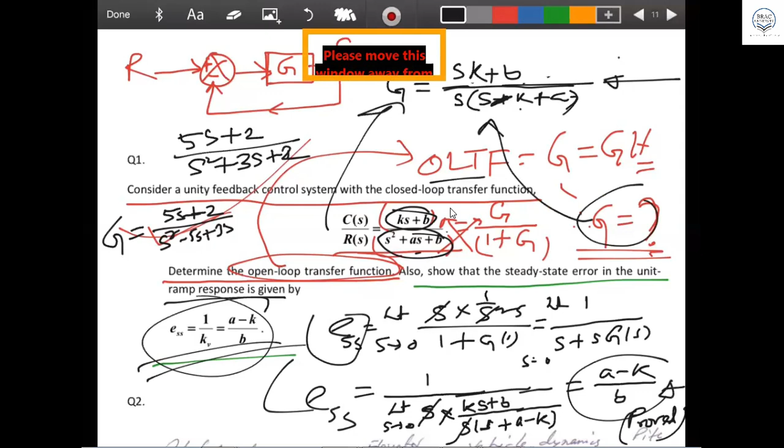You all can solve this problem, and I'm going to show you the last problem. I'm not going to solve it, just showing you because I know you will be in trouble. Look at this, this is the last problem you have to do. This is a question, and it's a very important question. This is the problem for steady state error. All of you have to solve this problem. The answer is given here.

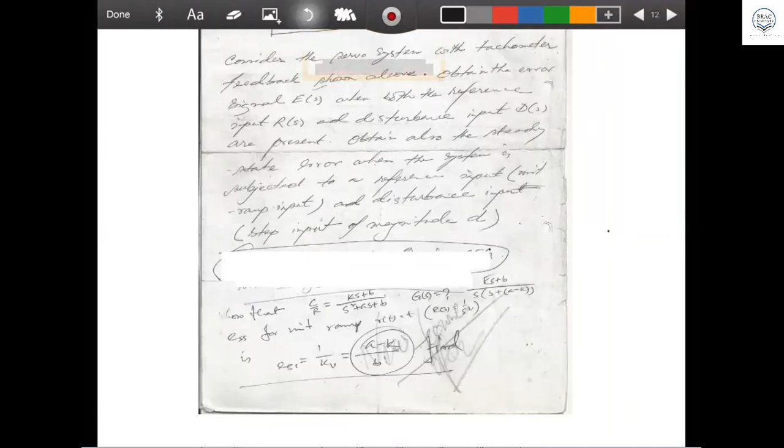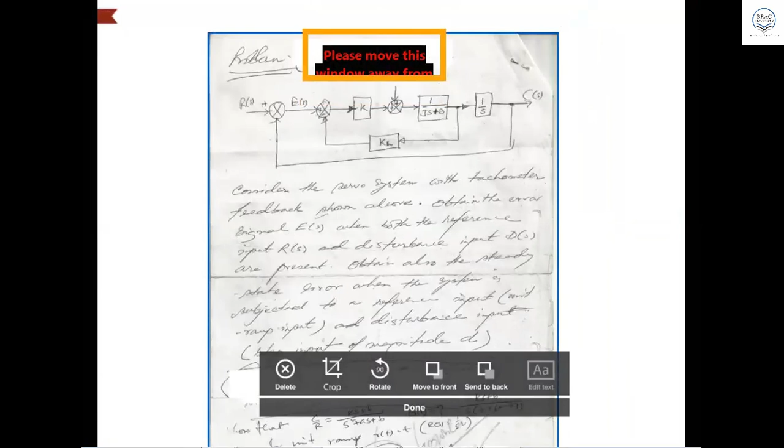Okay, now I have taken off the answer. I think it should be fine, no problem. I'm just telling you where you can find this solution. I think how to solve this problem, you can find it, where you can find this question. You can find it in the book Ogata, I cannot tell you the page number, but in the steady state error chapter in the Ogata book, if you try to find it, you can find it, and you can find the solution there also.

Very, very important. If you cannot understand, let me know, then I will explain it to you next class. That's the end of steady state error.